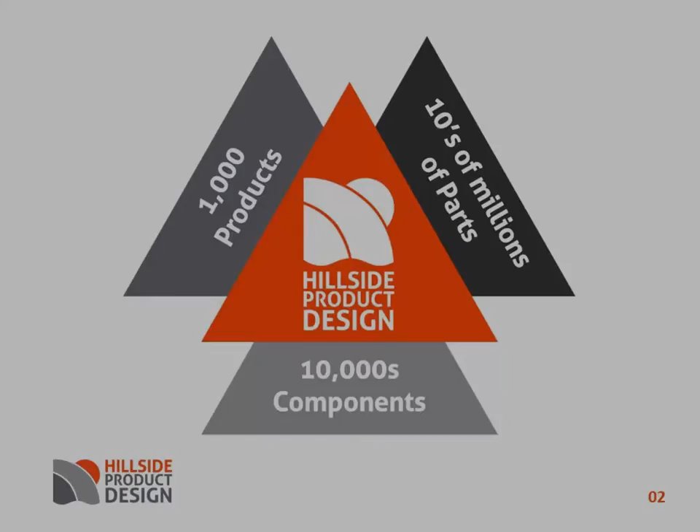I expect each of us in this room will be the first to say, I don't know everything, but I know a lot. Collectively, we know a huge amount, and if we were to collaborate to share that knowledge, then great things happen. Our mission is to support our clients with our specialist knowledge and to provide the tools and resources that help them make the best decisions about the products they want to develop. If we do our job right, then our clients gain the best possible advantage from their experience of the product design process. This can be measured on the balance sheet.

Don't just take my word for this. The Design Council's latest report said that for every £1 invested in design, a business can expect over £20 in increased revenues. That same report said that design-focused firms outperform their peers by 200%.

We always start from a position of mutual confidentiality with our clients to foster an atmosphere of open dialogue, encouraging straight talking, hard listening, and deep thinking. We quickly learn the requirements of the project, ask questions, and we don't avoid challenging aspects that need to be scrutinized. Quite often we will identify fundamental issues with the proposed project, and while this may be difficult for the person whose idea it is, the alternative would be very costly if it was not addressed from the outset.

Quite often we find it is not appropriate to immediately embark on product design if the client does not have a viable project. This is not meant to diminish their enthusiasm. It is a moral decision we take to only work on projects that can make a return for the client's investment. If we do embark on a project with a client, we will always encourage them to be involved in our design process and to participate as much as they are able to. We are very adept at understanding what the client is envisaging, even if it is a bit nebulous. We are well practiced at guiding and helping to bring ideas to life.

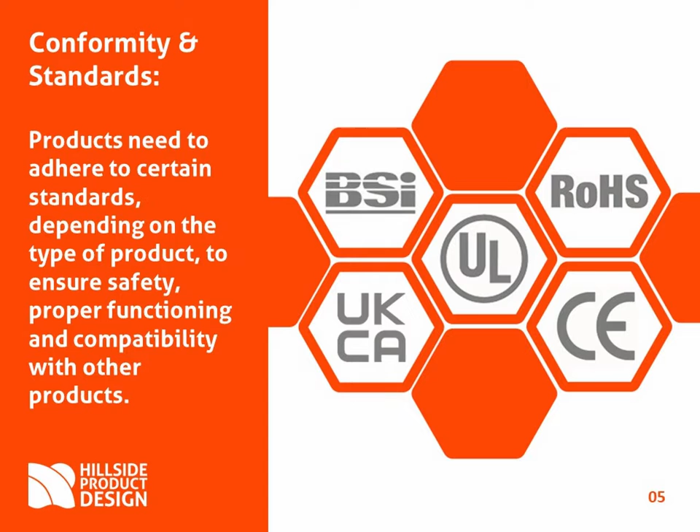Every product must be safe and conform to the standards that apply to its classification. Those requirements vary depending on the territory of use and they carry legal obligations. To avoid getting too technical and mired in the boring stuff, I will say that conformity and standards need due consideration. So, if you are starting with just an idea, how do you visualize it and bring it to life?

One of the first steps is to build a visual language everyone can use. We put the old truism, a picture is worth 1,000 words, into practice through the use of mood boards and hand sketching. A mood board is a collage of images and samples, like a buffet of aspirations, inspirations, colours and textures. Like any buffet, you can pick what you want.

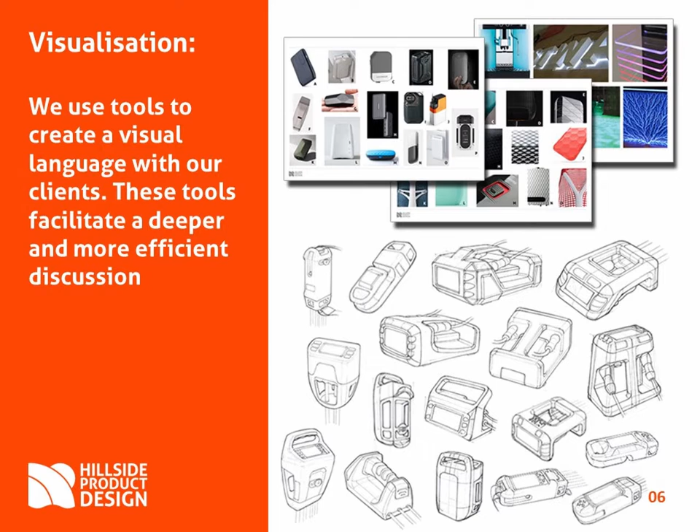Sketching is a hugely important tool in our process, and although not everyone can sketch, our designers are fluent and can photo fit an idea in no time. Imagine that you are in a meeting and are describing what you want verbally. The designer interprets and adjusts that in real time in front of you. Sketching is a very powerful and very cost-effective tool. In our opinion, fancy, highly polished images have their place, but not in the early stages. It's more important to use that time to refine the product design, rather than creating vanity images of little substance.

A picture can tell 1,000 words, but a prototype opens up an entire language. There is nothing better than experiencing something in real life, so at Hillside we use prototypes extensively. A prototype can be as simple as sculpting a lump of clay or foam to convey the size and shape of something, such as a handle. Or it can be as complicated as a fully functioning unit involving mechanical and electronic components.

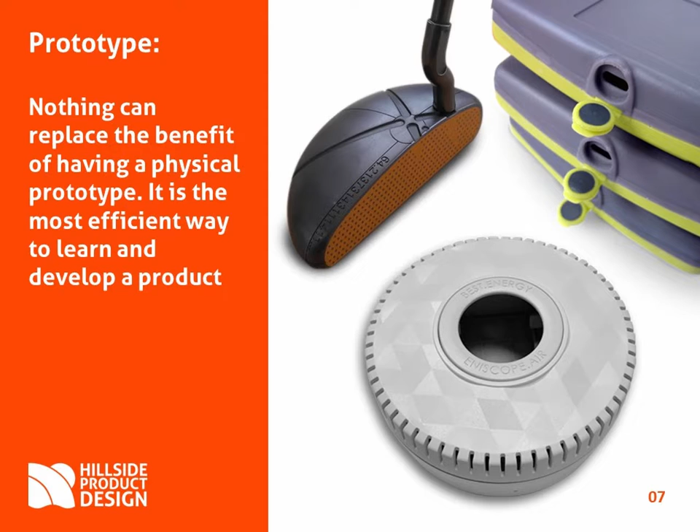Some prototypes may be devised to test one characteristic of the product. Some are built to be subjected to a battery of tests prior to certification. Some are built to be indistinguishable from the finished product for use in advertising and marketing. Prototypes are the surest way of testing what your marketplace feels about your new product before you commit to launching it.

CAD is the tool we use to create virtual 3D models of parts and assemblies, as well as dimensional information. The models can be programmed to include color, surface finish, material properties, and degrees of movement. CAD enables our designers to output highly realistic images and animations. And, because CAD designs are created and manipulated on screen, they can also be shared remotely through Skype, Teams, and Zoom.

Have you heard of augmented reality? This is where you can use a phone or tablet with a camera to insert a CAD model into a real-world view. This is great for conveying the size and presence of a product relative to physical reality. Have you heard of VR? That is where CAD models can be embedded into a virtual reality environment, so it can be experienced through a VR headset and accessed dynamically via user movement.

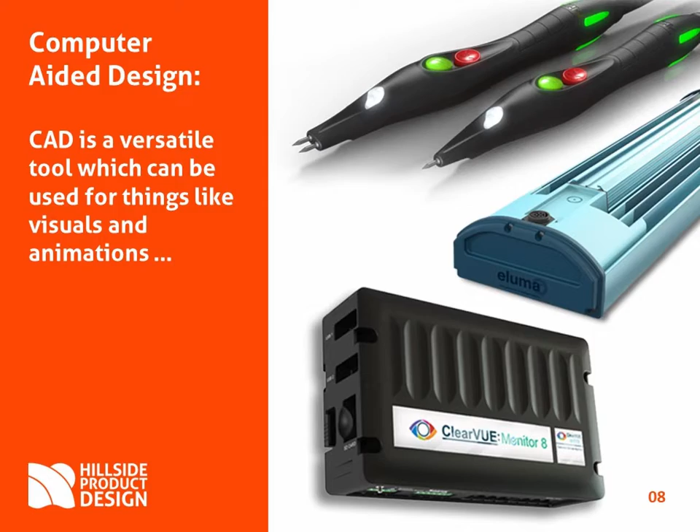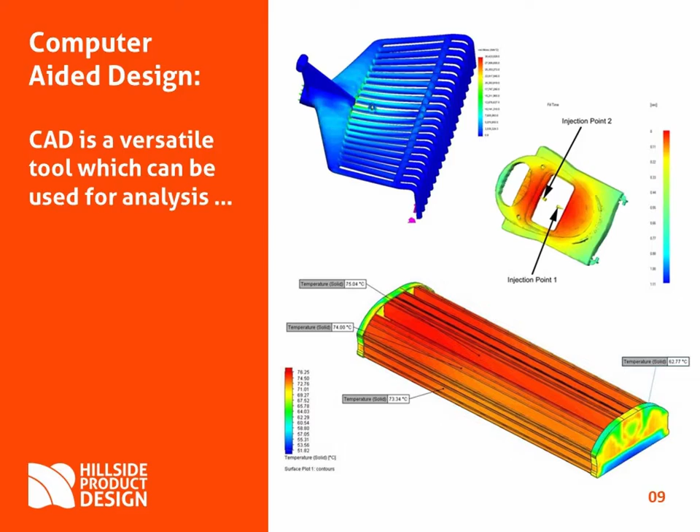CAD can be used to assess movement, assembly, fatigue, stress, tolerances, mold flow, and thermal management. For decisions critical to product development, we usually use virtual and physical testing side by side. Comparing physically tested results with simulation test results helps to build confidence that a new design is based on sound principles.

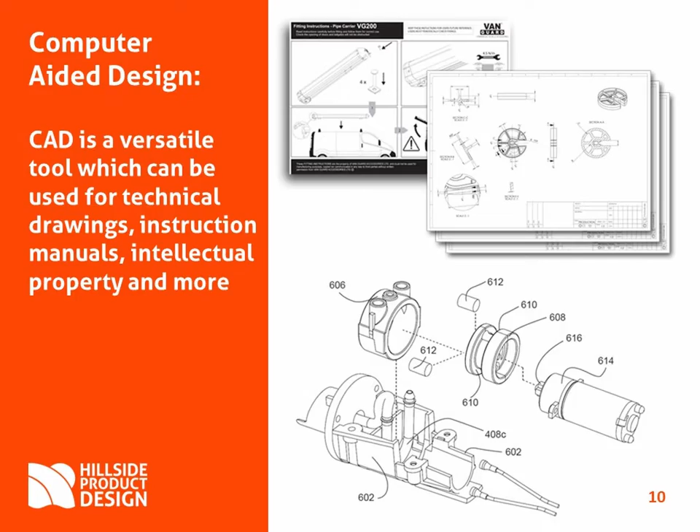Another way we use CAD is for producing highly accurate and detailed drawings for manufacturing partners. These drawings are the bedrock of contracts with manufacturers and set out the quality controls that will be applied. We prepare our manufacturing drawings to universally accepted standards so they can be used globally. A lesser known output from CAD is that it can be used for creating illustrations for intellectual property documents and instruction manuals.

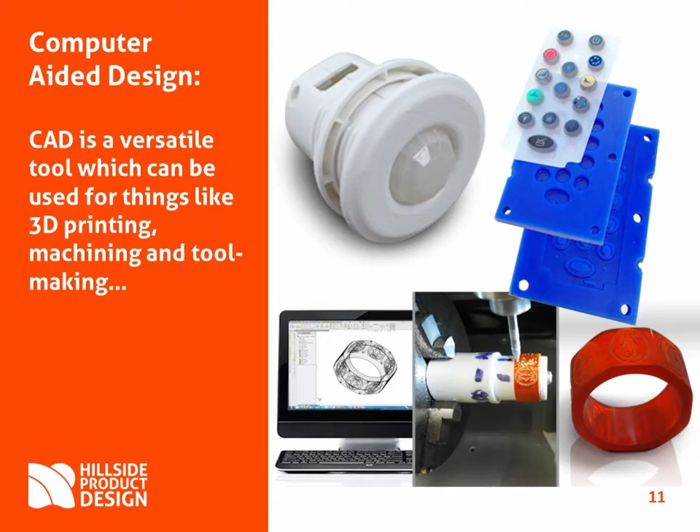Another way we use CAD is to create CNC exchange files. They are used by computer-controlled machines such as 3D printers, lathes, and milling machines, and are the link between a virtual part and a real-life part. The method by which the part will be manufactured should always inform how it is designed, and so we design for manufacture from the beginning of every project.

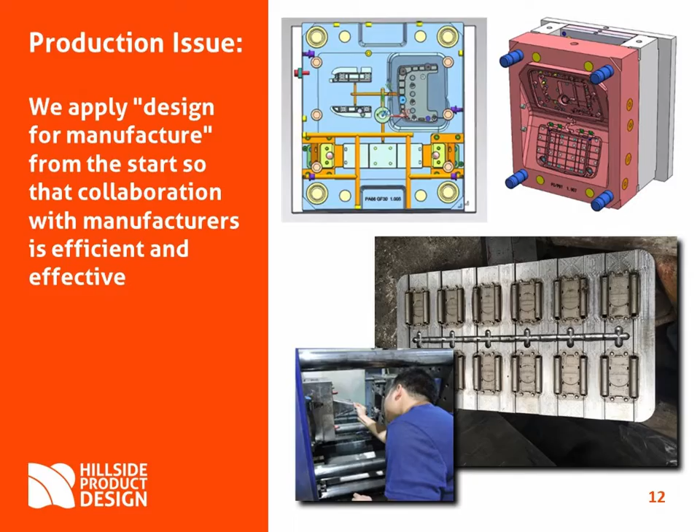At some point there is a transition of a product from virtual to real life. Our expertise with this transition is shown by the number of successfully manufactured products we have delivered. As our portfolio of new products expands, so does our depth and range of expertise, allowing us to collaborate efficiently and effectively with manufacturers. As an example, here is the world-famous illuminated Xyloband, used by Coldplay. Millions of these have been manufactured, and they are still being manufactured.

To make Xylobands, several injection molding tools are used. Plastic is melted, injected into the tool, and after the plastic has solidified, the tool is opened, the parts are ejected, and the process begins again. The cost of a part is driven by plastic volume, the energy to process it, and the rate of manufacture. You can imagine how a saving of a penny per part can easily mount up, and so we are therefore constantly optimizing our designs by reducing costs and resources without adversely affecting performance. That approach must be second nature to a product designer, not applied as an afterthought.

The first time an injection molding tool opens and a part is ejected, that new part starts off a detailed investigation which verifies the design and validates the decisions made in its origin. For example, does it function? Is it cosmetically correct? Does it assemble? Critical dimensions need to be assessed and reported on. At its simplest level, the reporting can be purely fit and function, but for some parts, a full report for compliance and quality control is required.

Occasionally, adjustments are necessary. That might sound like a tricky situation, but it doesn't have to be. Our experience tells us where an adjustment might be needed, and these adjustments are documented in advance, so they are expected and planned for.